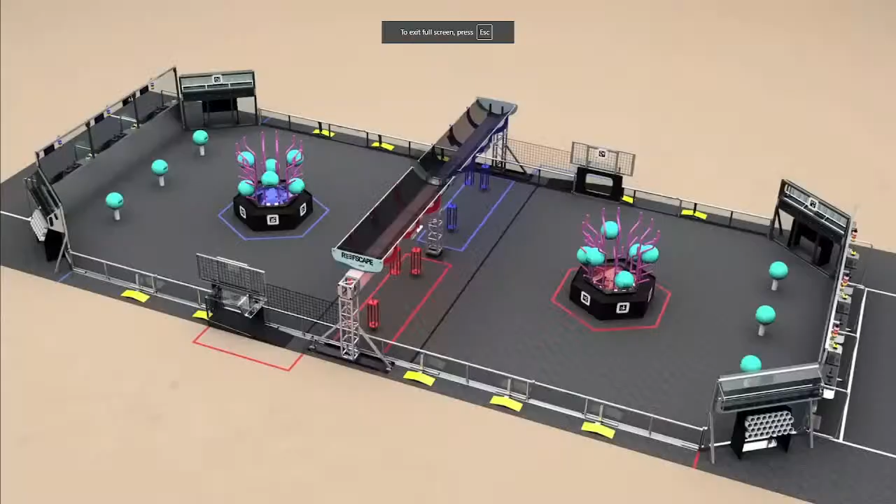Welcome to the 2025 First Robotics Competition game, Reefscape, presented by Haas. Two alliances of 3 teams each compete to earn points by harvesting algae.

As many people have already realized, there's no point in throwing algae into the barge. That's just something I've noticed through Chief Delphi and through my own team experience. It's just going to be too unreliable to shoot it up. I still think we'll see bots that place it into the barge. It's a lot of time for, granted it's a fair amount of points, it's just a lot of time that you could be scoring coral.

To earn points by harvesting algae, scoring coral on their reef, and returning to their barge to ascend to the...

One thing I would like to really fit in this robot is a deep climb. I don't know how doable it is, but it would certainly be a good learning experience to manage what I can actually do.

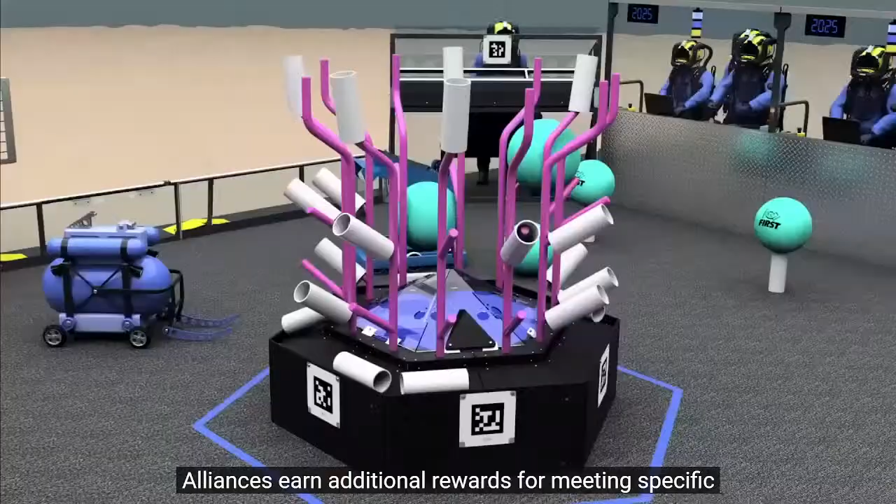The ocean's surface. Alliances earn additional rewards for meeting specific scoring thresholds and for cooperating with their opponents. Prior to the start of the match, teams can choose to hang a shallow cage or a deep cage on their barge. Robots start each match at their starting line and may be preloaded with 1 coral. During the first 15 seconds of the match, robots are autonomous and can be programmed to leave the starting line,

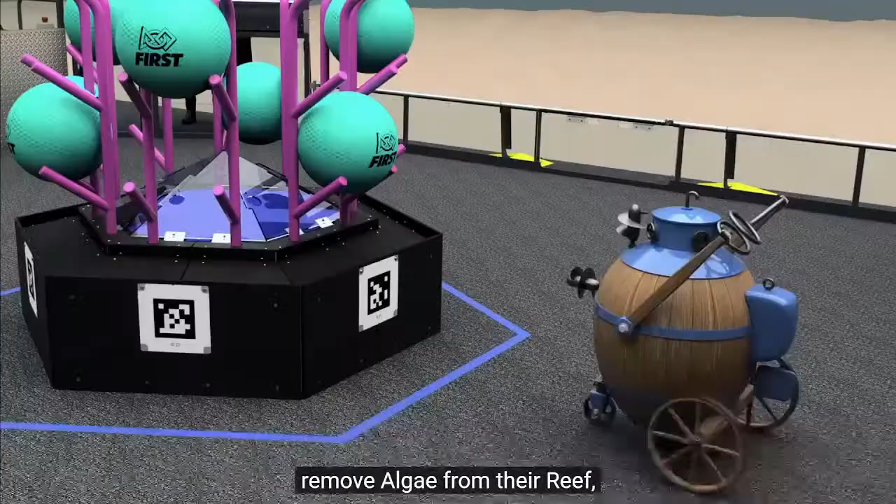remove algae from their reef, and place coral on their reef.

So another thing about my robot is I've got 2 ideas for how I want to score coral. My main idea is just a simple 2-stage elevator that can extend up a bit higher with an arm that scores on the top part of the reef. I also have another idea, which, if I can do it, would be really cool, but I don't know how the rigidity would be. So I was thinking, what if I do a 4-stage elevator with 1x1 tubing?

I don't know how this would work. Maybe it's a terrible idea. If it is, tell me. But I think it could be really beneficial because I could keep quite a low center of gravity, and it might make climbing a lot easier, especially on the deep cage. The deep cage, if I remember correctly, is only 3.5 inches off the ground, so it's a tricky one. If I go with that idea, I'll also be doing a funnel to retrieve coral, pick it up, and then extend upwards with the elevator.

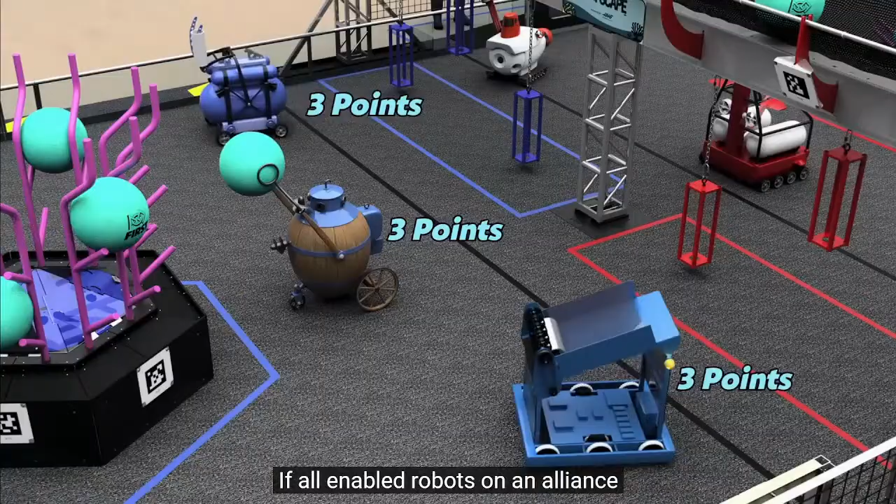If all enabled robots on an alliance leave the starting line and score at least 1 coral in auto, the alliance earns the auto ranking point. During the following 2 minutes and 15 seconds of the match, drivers control their robot.

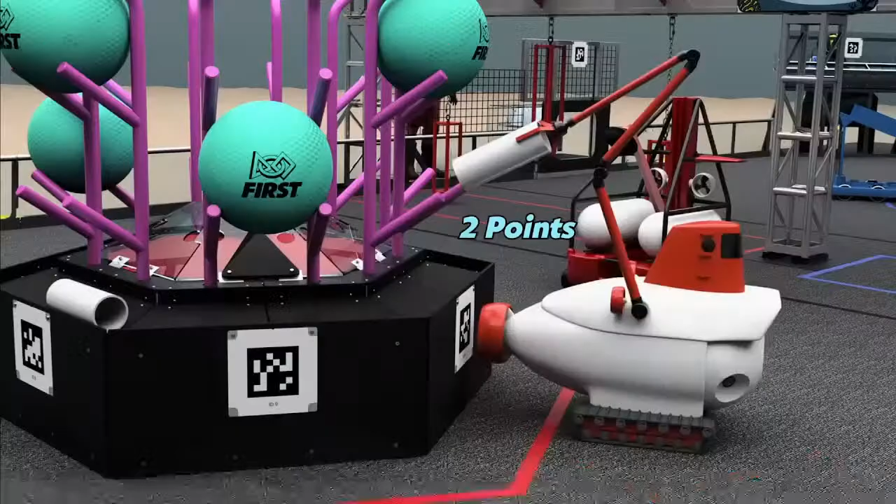Robots can place algae in their net and collect coral from human players at their coral station to place on their reef. Coral placed higher on the reef are worth more points. If an alliance can score enough coral on all 4 levels, they will earn an additional ranking point. The ranking point,

Again, it would be good to have pretty fast cycles to get that ranking point, though you'll see later on it might be worthwhile to also have an algae manipulator, either part of the same mechanism or a separate thing to remove algae from the reef, score it to lower the ranking point threshold.

Robots can also deliver algae - here it is - to their processor. Once processed, the algae can be taken by the opposing human.

One thing to note here is I paused it right when they said it, but this was a little unclear to me at first. Your human player isn't on your side, it's on the opposite side. So when you score algae into your processor, which is what they just showed, it gives it to the opposing team for the opportunity to throw it into the barge, the upper part.

The good thing is, even if you score a processor point and they make it into the barge, you still have a net 2 points that you gain, with the possibility of 6 points. To explain that, scoring in the processor is 6 points, but then the human player can throw it into the barge for them to gain 4 points. So it's kind of a trade-off, human player and scored into the net.

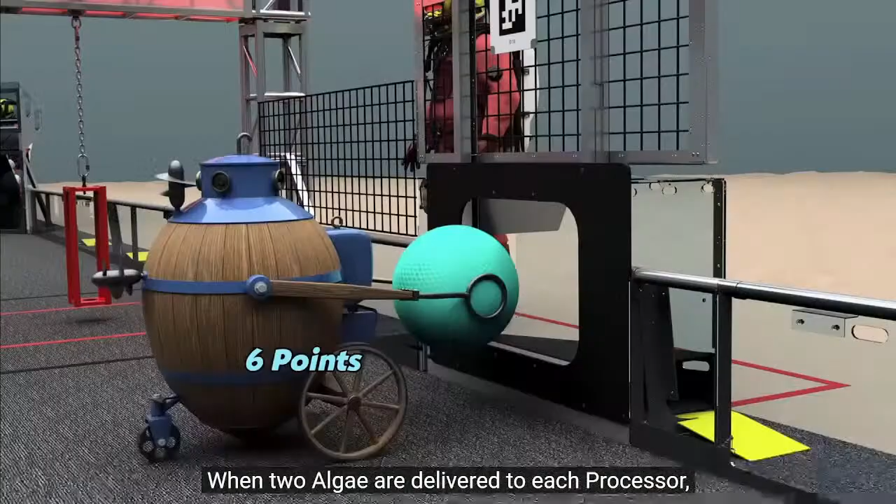When 2 algae are delivered to each processor, both alliances earn a co-op point. The co-op point reduces the number of coral needed on the reef to earn the ranking point. This is what I was mentioning before, where it makes it a lot easier to get ranking points if you can score that 2 algae, and it influences a team's rank in the tournament.

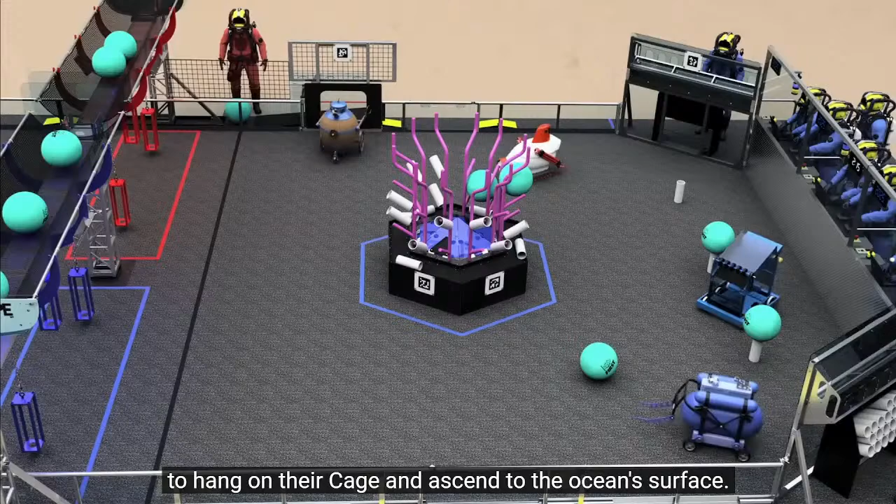As time runs out, robots race back to their barge to hang on their cage and ascend to the ocean surface. Points are awarded to robots that can hang on a shallow cage, and even more points are awarded to robots that can hang on a deep cage.

An alliance that scores enough barge points will earn the barge ranking point. That requires 14 points in endgame. So deep climb is really good to have, because if you can deep climb, you're pretty much guaranteed a ranking point every match unless something catastrophic goes wrong.

Deep climb gives you 12 points and just a park gives you 2, meaning if you have like just a chassis bot and a bot that can deep climb, you've automatically got a ranking point for endgame, which is really good. Granted, having a chassis bot on your team isn't the best idea, especially after alliance selection, but you win some, you lose some.

The thing about shallow climb is that it's only 6 points, so it's half the score towards that ranking point. So you would need 2 people shallow climbing and another person parking for the barge ranking point. The alliance that earns the most points overall wins the match.

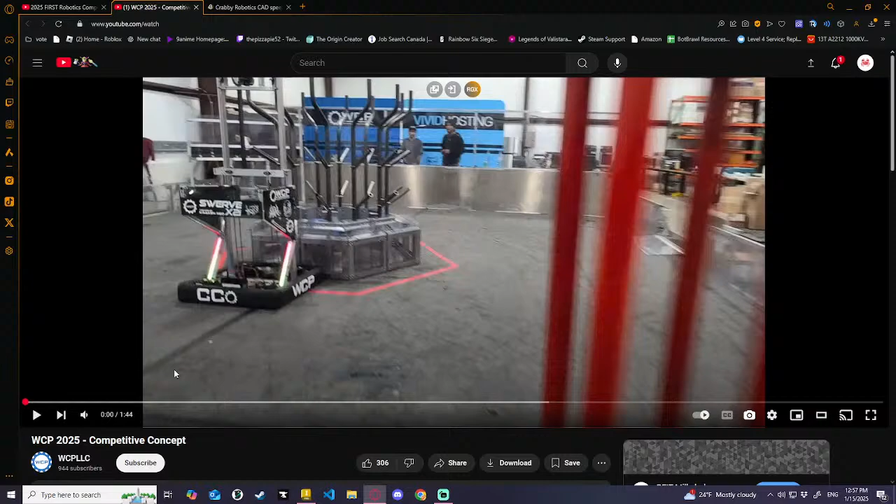So next thing we're going to watch is the WCP 2025 competitive concept. This is a bot that West Coast Products put together, one of the FRC suppliers. Without further ado, let's just watch this and see what I can gather from how they assembled their bot and how I want to do mine.

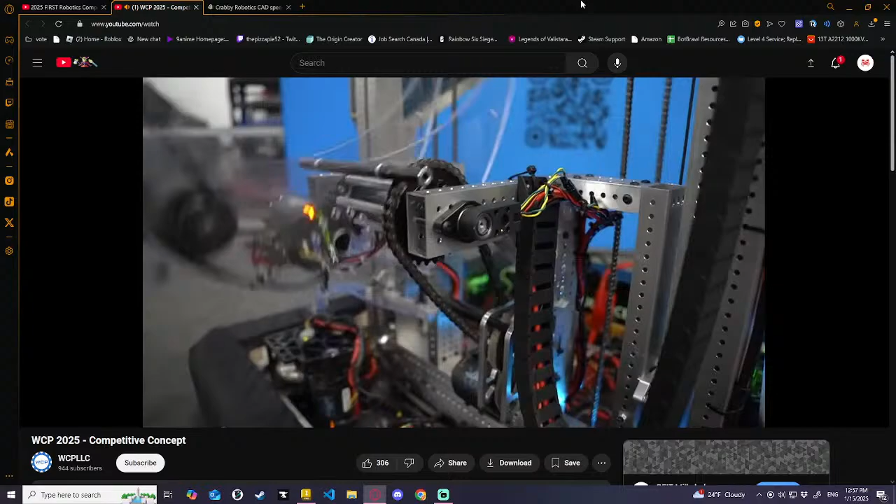One thing I would like to note is what they're doing is 2 stages in a carriage, which definitely works, but this bot would likely have a really high center of gravity, meaning it's a bit more tippy, and the elevator probably can't accelerate as quickly.

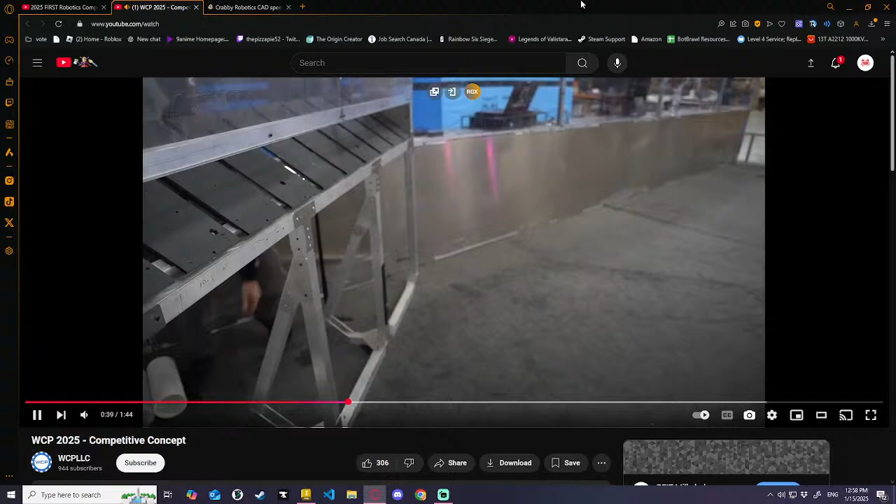One more thing I would like to mention is, see how they have the funnel there? They have a limit to how fast they can cycle, not by their drivetrain or anything, but because when they feed the coral, they have to wait at the human player until the elevator is in its rest position. So right here, you can see the coral manipulator. This has to be in this position before they can drop the coral, because if they don't, then the coral is just going to spit right out the other side of the robot.

That's what I believe, at least. I haven't taken a look at their CAD yet, but I probably will at some point in the future.

Yeah, see how their coral kind of spun around a bit here? Rewind. Yeah, I'm not sure why it did that. Maybe it just caught the wheel at a weird angle, but that's something to consider, because that could have easily deflected and gone straight out the other side above the manipulator.

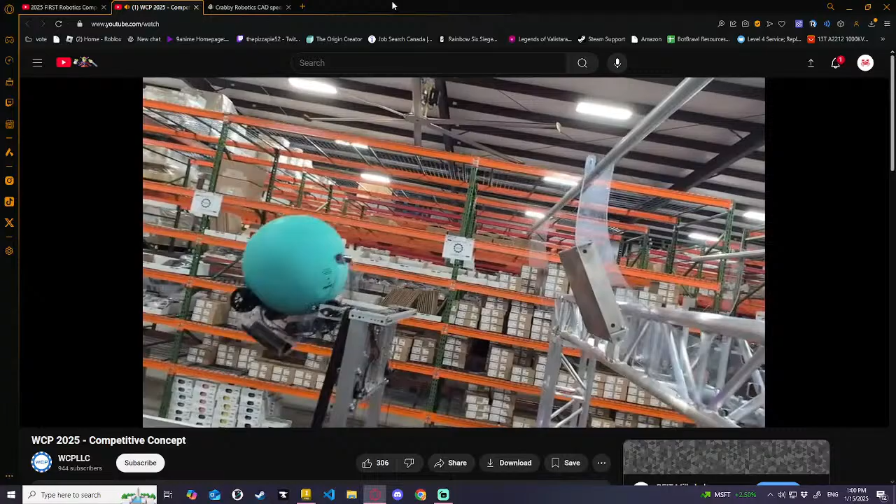I'm really impressed that they actually managed to do the barge with a 2-stage and a carriage. And of course, shallow climb. Not a deep climb, but still very impressive.

Alright, so that was the WCP competitive concept. Next, we're going to be looking at the 2025 EveryBot. This is the last thing next we're going to look at: Ninjineers Robot in 3 Days.

This is a bot that I really like. Hopefully they have the review video on here. Yep, here it is. This is a really cool robot. I'm like, if I was to build a robot in 3 days, like take one of their designs and build it, this is the robot I would choose.

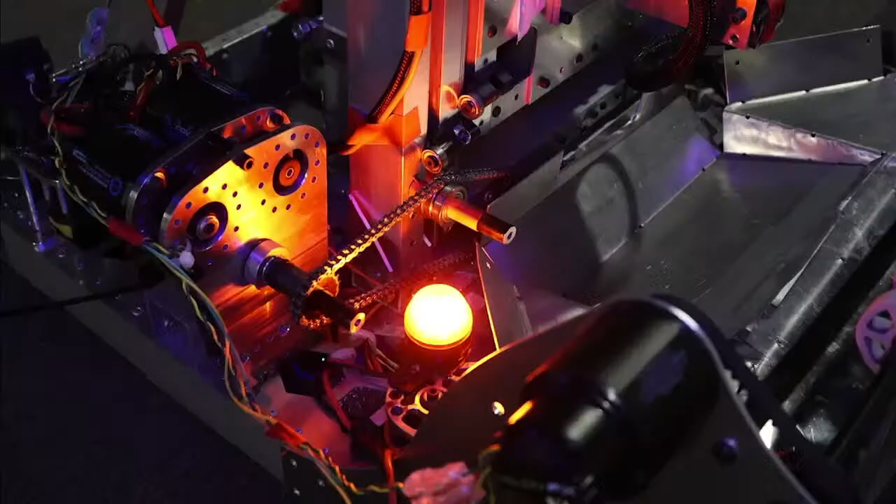One thing I'd like to note is I like that they have that ground intake, because I feel like it would be more beneficial to just drive into the wall, pick up the coral, drive away, and then worry about messing with your elevator.

Because even if you have something that feeds into a hopper and then picks up the coral, you still have to wait that slight amount of time where the coral is in free fall and falls into your funnel. You have to wait another second just to get it to rest in position so you don't shuffle it around when moving and get it lodged somewhere you don't want it.

So the good thing about this design is they have this intake with a manipulator that flips around and spits it out from the bottom, which you'll see in a second. So they can just get the human player to drop the coral on the field, drive straight into it, intake it, and drive away, then worry about their elevator adjusting and picking it up.

Yeah, I love the way they pick up coral. It's a really cool design.

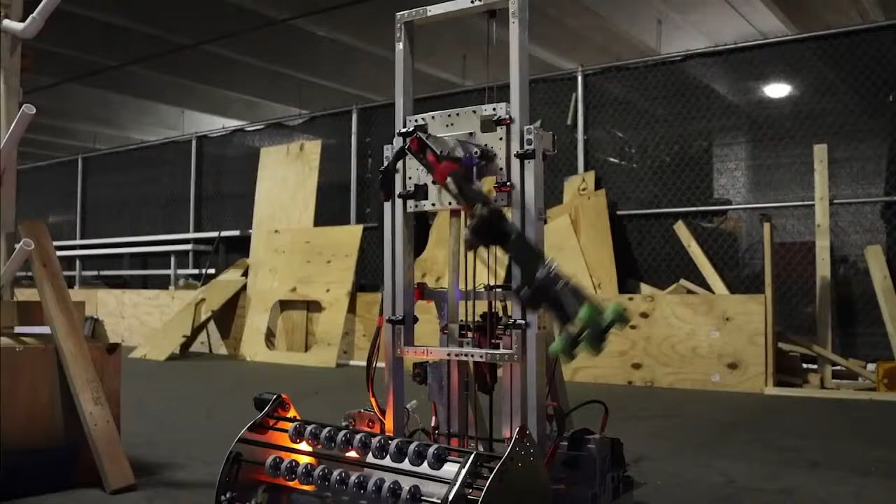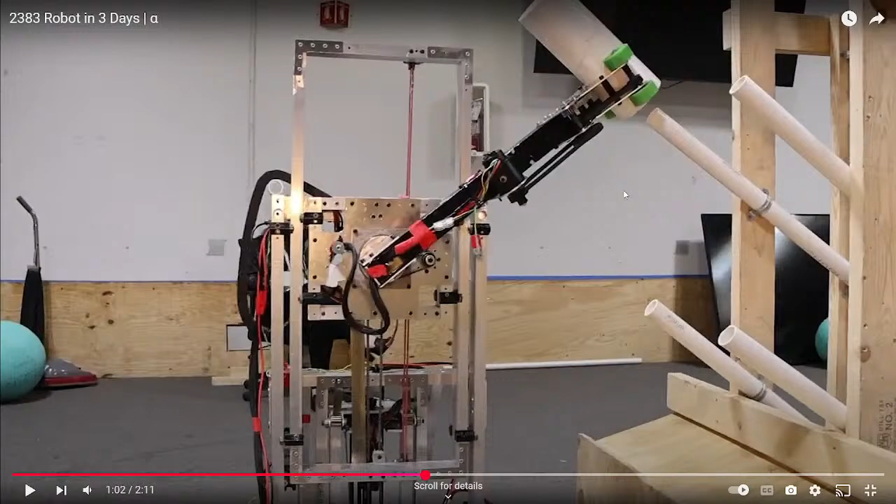The only thing I'm not a fan of with this intake design is the way they have to put it onto the thing, then go down and eject it. I feel like it would be faster to shoot the coral downwards onto the post, then you could drive away sooner. Just one thing I've thought.

Such a cool way to program the elevator to pick it up. I really like it.

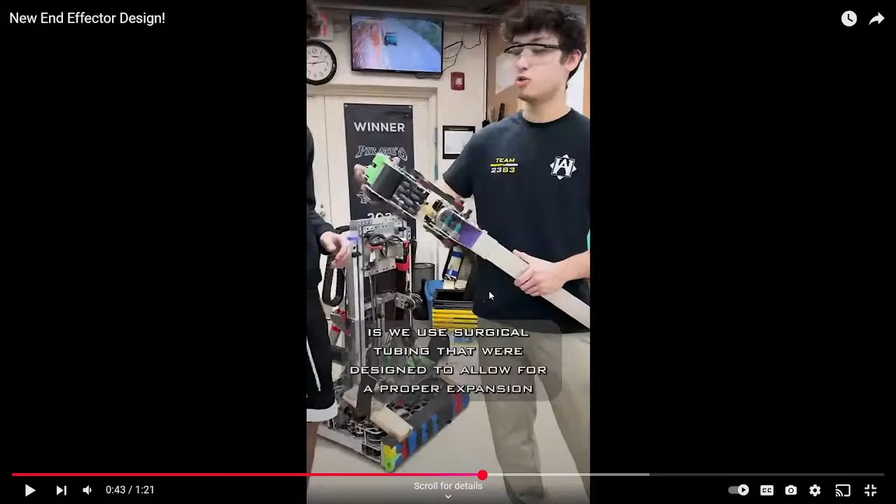Well, they also have a really cool end effector that I want to show you. It just replaces their old end effector, and yeah, surgical tubing instead of springs. It's probably lighter, allowing for proper expansion with proper compression of the algae as well as the coral.

The final kicker of our new design is, in fact, a center kicker. Yeah, that's the one thing I was worried about, not having that center kicker to shoot it down, and it seems like they've fixed it on this design, kicking out the coral when scoring rather than forcing us to slam down to outtake it.

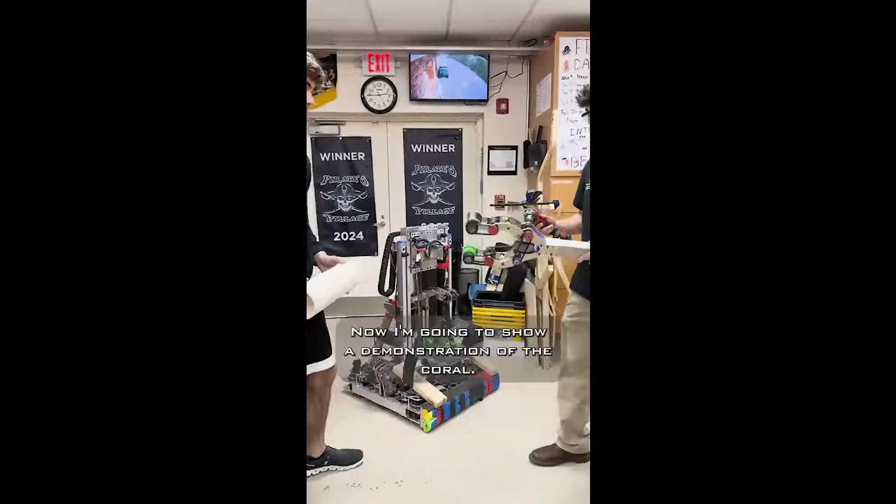Now I'm going to show a demonstration of the coral, and then score it on the kicker, just like that. Now for the algae.

Yeah, having that kicker will 100% reduce their cycle time. Blown up to appropriate size is how we take it, and they have a really strong grip on the algae, it seems.

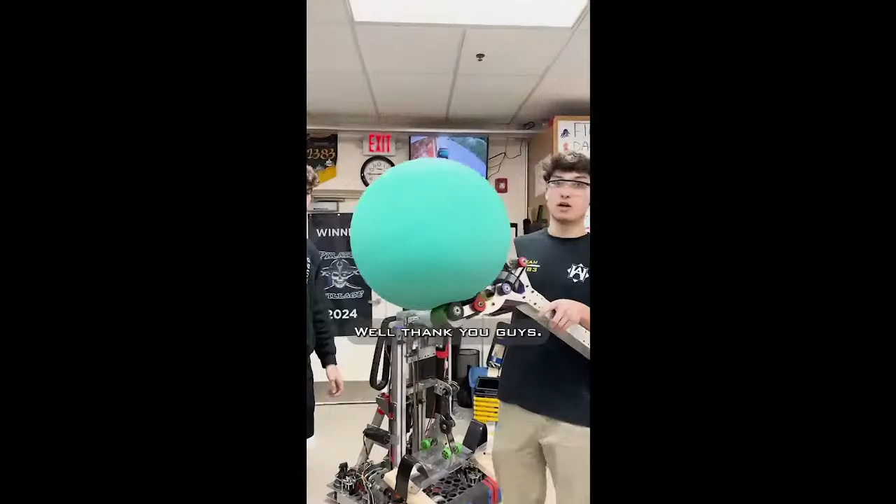Alright, we're not going to worry about watching the everybot.

So without further ado, I'm going to create a master sketch and start plotting out what I want everything to be. Okay, if I see elevator blocks, this is something I'm going to need to decide on - what elevator blocks do I use or modify to use?

One thing I was looking at was something like this, where it clamps on either side of the tube. Because then I don't have to create anything custom, like create a new CAD. See, they show it even working on 1x1 tubing here - it just clamps around the outside. That might not be the exact same one, but it shows the proof of concept.

Yeah, there's obviously not a whole lot... oh no, AndyMark has something for 1x1 tubing. I lied. But generally, most elevator blocks for FRC are made for those 2x1, like 16th or 8th wall tubing.

I definitely think 1x1 tubing is the way to go with the amount of stages I want, because on my own team recently we had issues with weight and our elevator being really, really heavy. So I think this could lighten it up by using 16th wall 1x1, and then I might not encounter as many weight issues.

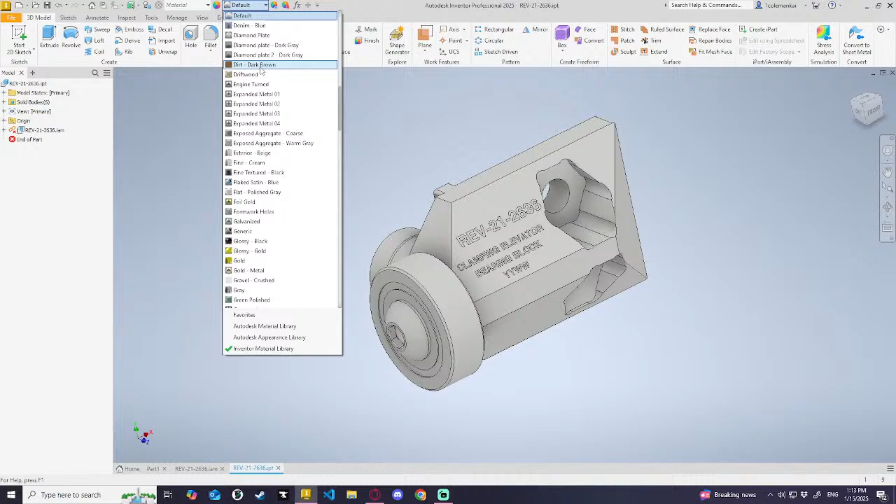Should work. Oh, that did nothing. Just gonna set this to glossy black. Yeah, that works. I need to save this because I have the simplify.

Alright, let's start planning the elevator. So we need 1x1 tubing, 1 inch.

No, I'll do a mirror. Should work. I'll just focus on one side for now, actually.

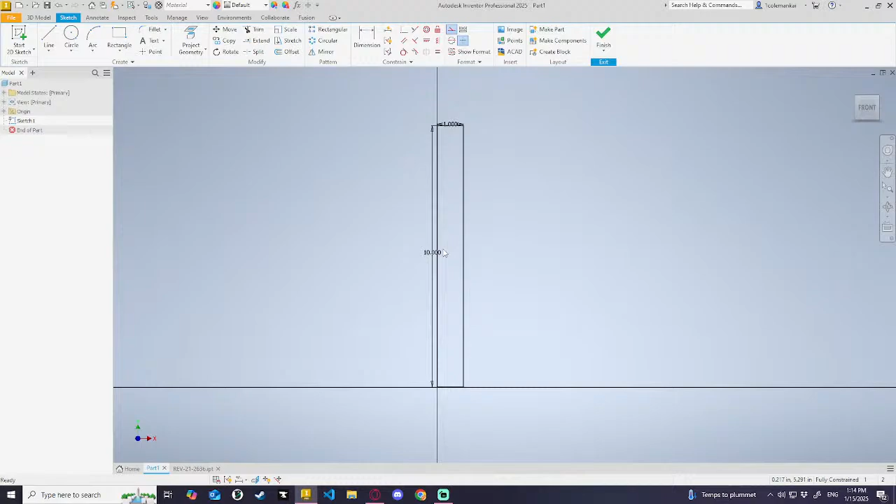A little indecisive. So if I do 4 stages, highest is 72. 72 divided by 4 is 18. So if I do 20-inch stages, that should give me more than enough room to reach the top of there, maybe even the barge, which I don't think I need to do, but might be a cool thing to do.

No, I don't need a drawing. What am I looking for? Here we go.

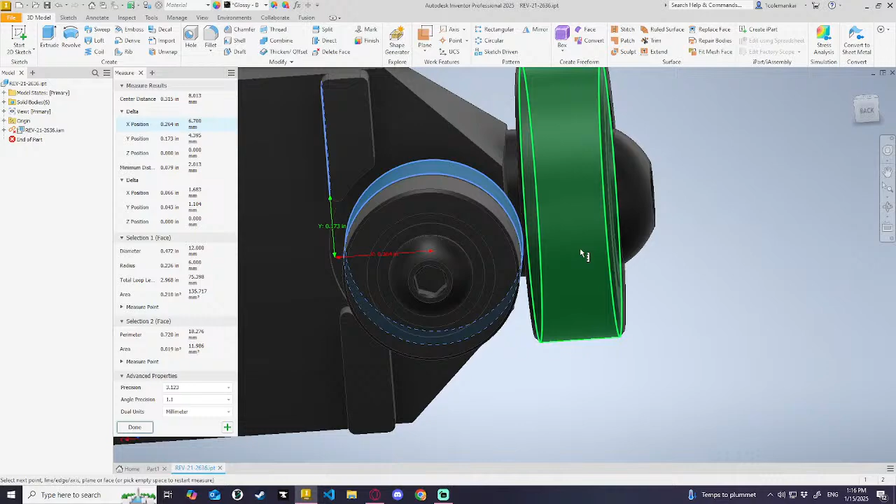It's not ideal, but it is what it is. It's mounting to the side, so it has to be a decent bit. I was thinking of the WCP or SCS ones that mount to the top, like through it.

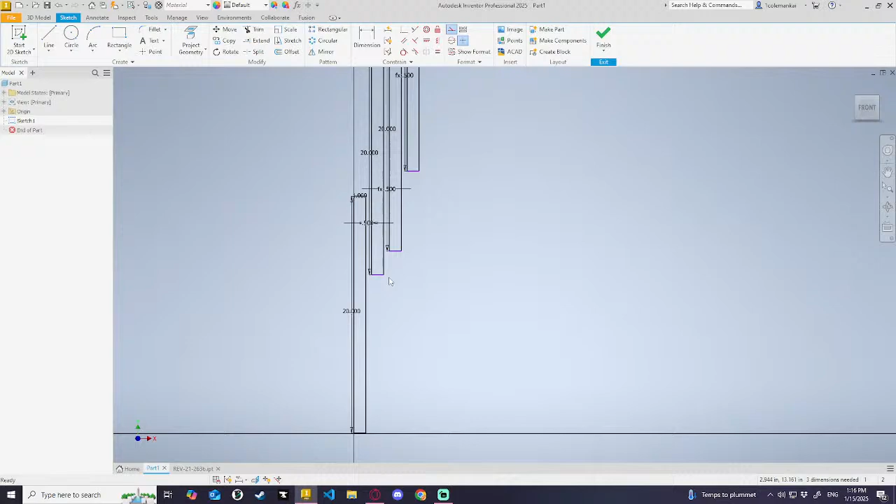Alright, now I can set. Do I want continuous or cascade? Cascade might be a bit easier to design because I'm not too familiar with continuous. So yeah, I'll just leave it as cascade. But for this demo, I'll do continuous just so I can simulate it.

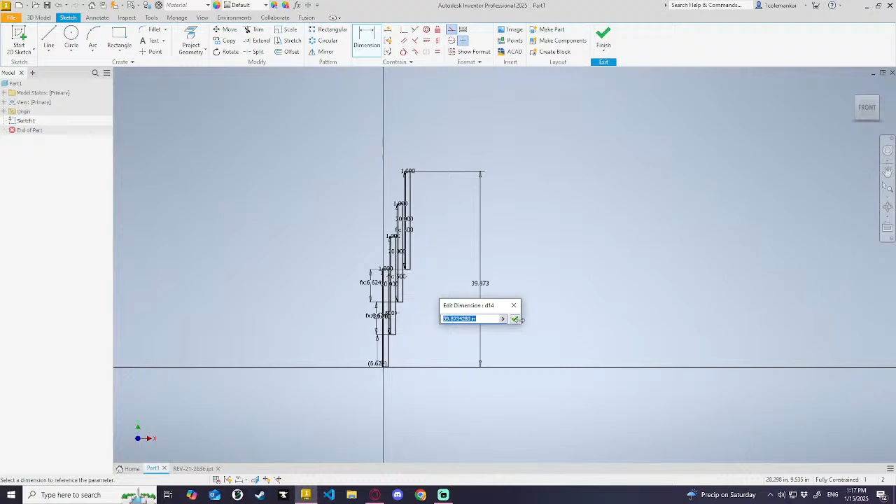Right now, I do twin dimension here to here. Except, okay, perfect. And my maximum extension is going to be over 72 inches. Probably closer to, let's just set this to...

Say 1 inch, that's our limit. 77, that's plenty, that's like on the extreme side. Now I can just create a line here, doesn't have to be perfect. Mirror this.

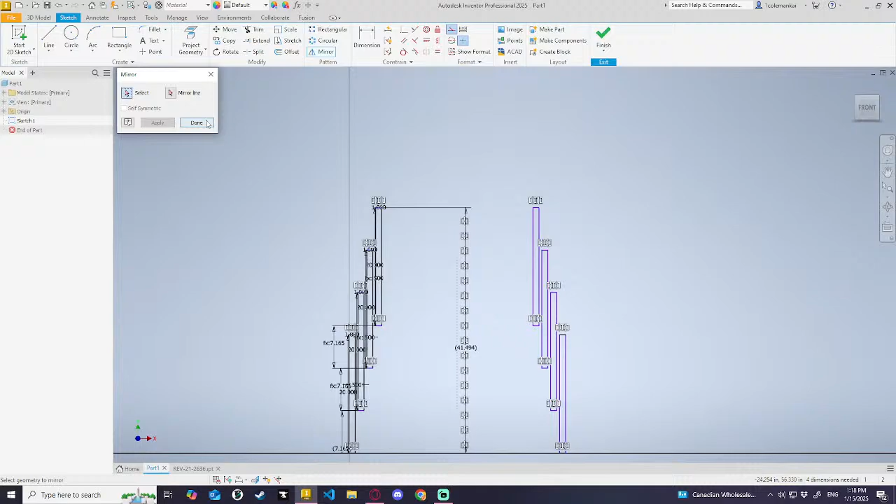Outside of these lines should be 30 inches. What does that leave me on top? That leaves me 19. That's more than I need, so I set that to driven.

That to not driven. Say 10 inches. 21. I think that works, just gonna do a sneaky sneak.

Check what this... No, no, no, no. Oh, that's what I need.

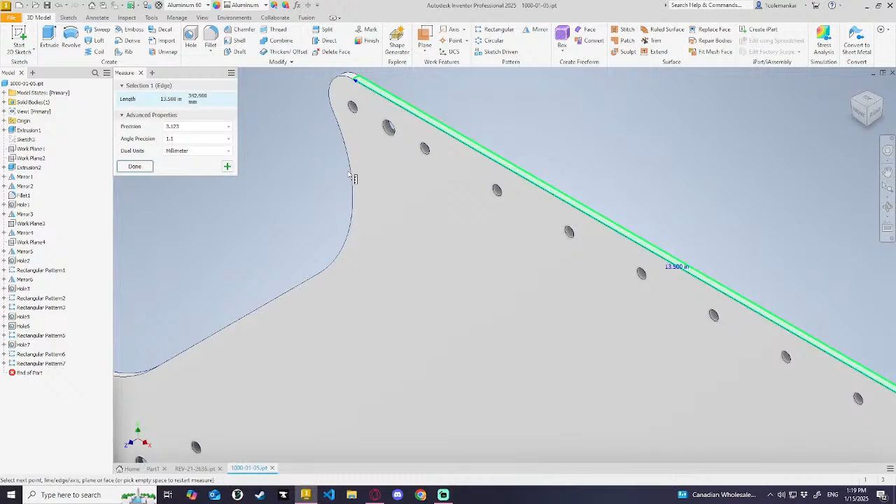I can probably fit my entire thing with an 8. It's 19, yeah, I can just do some standoffs. Let's be generous with 9 and call it a day.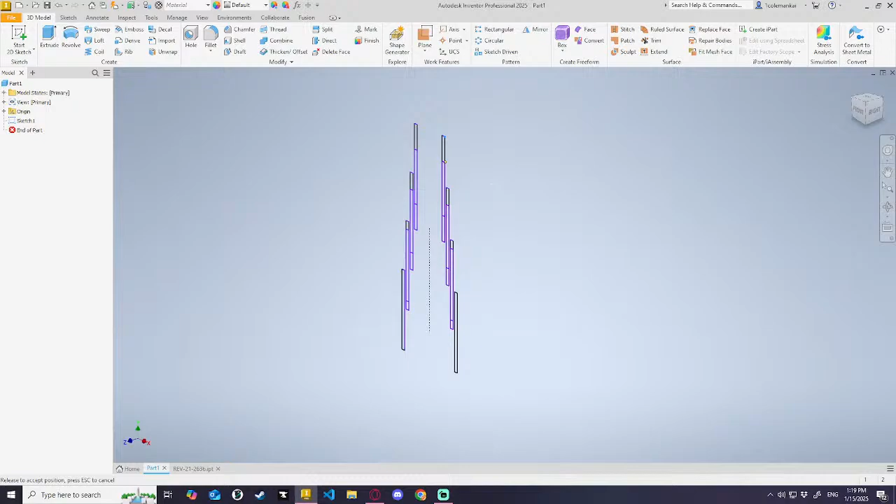No, finish. Good, turn off dimensions. And there's my elevator, 4 stages, all the way up to there. This is gonna look really clean when the CAD is done. Alright, now I can save that.

Now I need to make a sketch for our manipulator. So I have to decide if I want something that goes through the center of here, or across the side, or over.

I remember seeing something on Chief Delphi, I can try and find it. Trash CAD. Here we go. This is what I was thinking of.

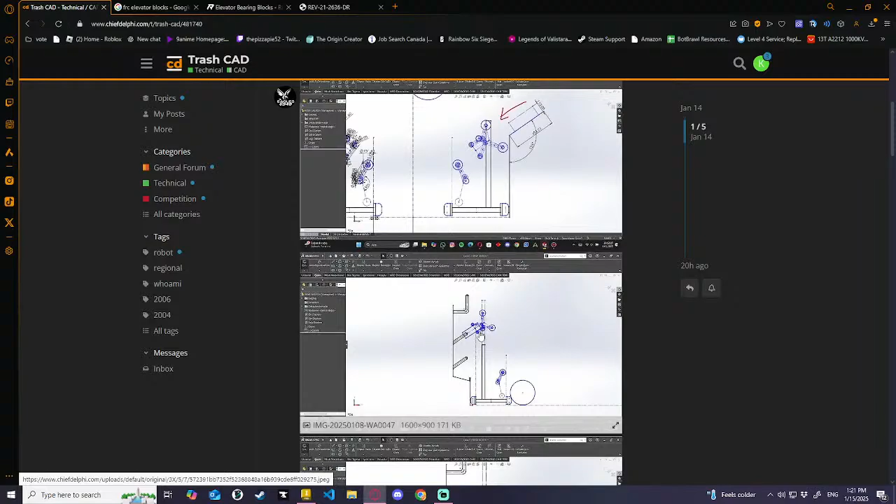So it's got one side for algae, one side for coral. The whole thing can spin around and pick up whatever it needs. There are teams, including mine, using the same 2 rollers for picking up algae and coral, but I think it might be better for sustainability of the algae and reliability to have separate, more spaced rollers for picking up algae, which shouldn't be too much of a weight loss or weight gain.

I think I can make it work. I'll just use about this here. Yeah, see, it's got the, no, not that one. No, maybe that was right. Yep, yeah, this is what I'm thinking of.

So it's got smaller rollers on the front. I think it has sushi rollers across here or something similar, like a roller, roller, roller. So 3 sets, 6 sets, because there's 2 on each. But I think it'll work.

Ah, I keep misclicking Visual Studio Code. It's annoying.

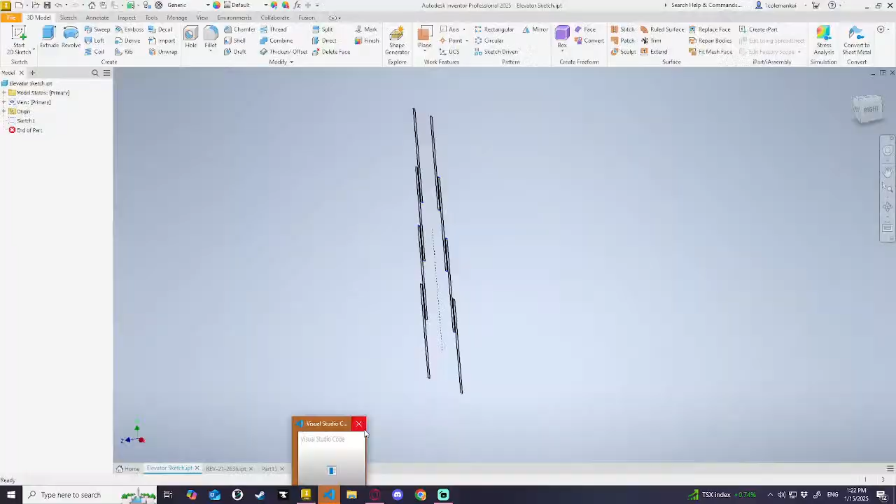I'm doing an orange roller. Now line. Oh, line between the two. Make that vertical and construction.

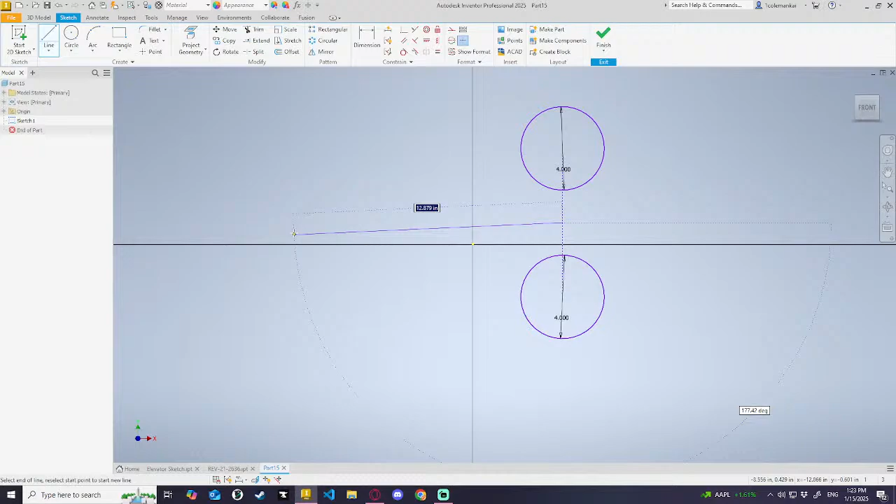And I can do 2-inch roller dots, kind of that construction.

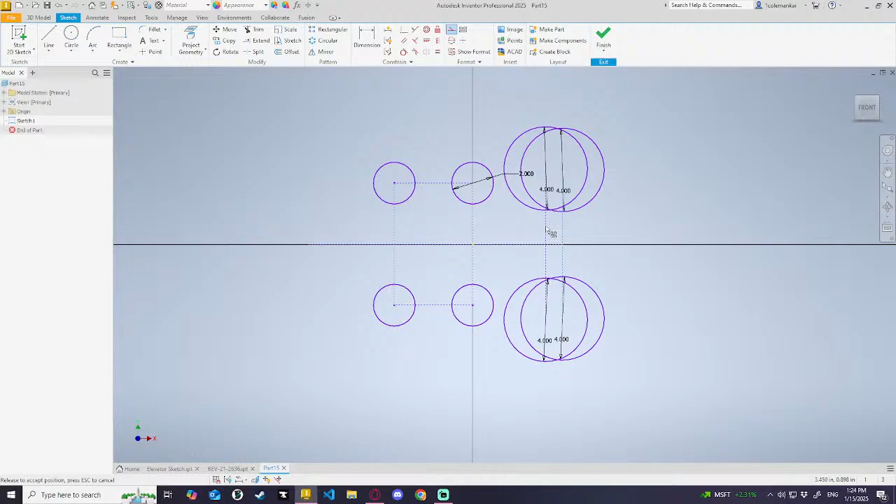Okay, so this is kind of what I'm thinking. Maybe it's definitely not to scale yet. Probably be more like this, with these farther apart from each other. This distance, let's say 3, so its total is 4.5.

Let's try 4 just to start. This 3 inches away, no, 4 inches. This to this, 3. Yeah, that'll work. And then if I add a 16-inch ball,

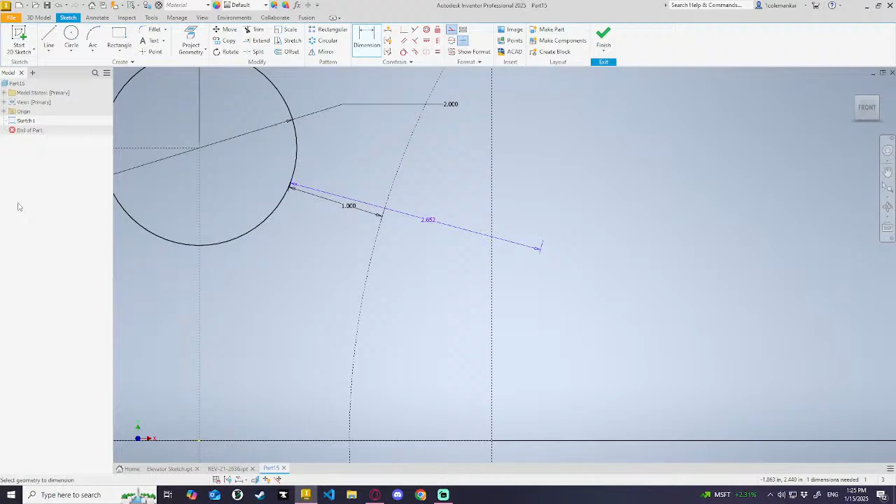tangent that, tangent that. Here, here, for that to be 1 inch. It's a bit more than I want. 2 inches. This is gonna deform, so I can probably do 3. Yeah, I'll do 3-inch wheels.

Set to 2. No. 4-inch with 2.5. Also trial and error. This is gonna be 3. So that's my rough idea for all the spacing and everything, how it's gonna look.

Then I'll have belts going from here, like between these. No, what do I want to do? I'll do a belt here, no, here across. And on the other side, belt to here, no. Might have to do behind, in front, behind, in front. Then connect the motor to one of these, like running to here.

I'm just trying to think how to package this well. Oh! I might be able to fit small pulleys inside the center, because that might even help the coral. When it squishes, it'll ride along the belt. We'll see. Yeah, I think that'll work.

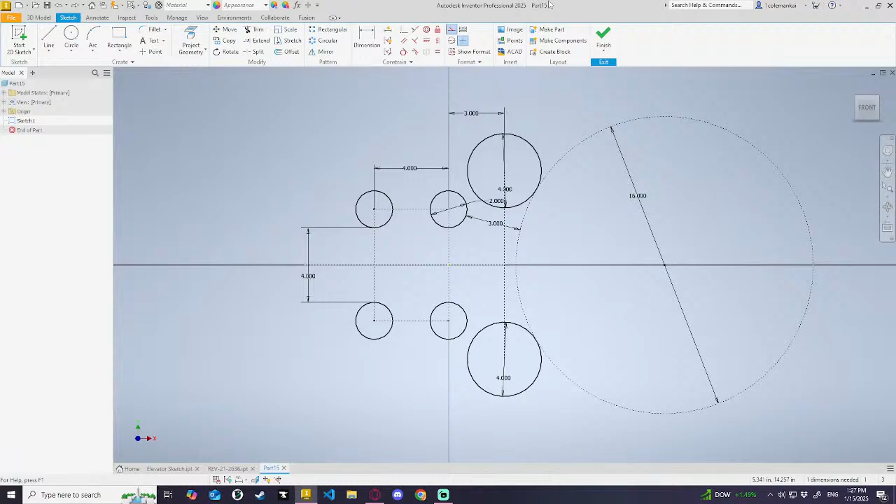Or actually, I'm gonna make my actual part first. Save this as... then do a new part and pretty much just remake that, or I can just save as.

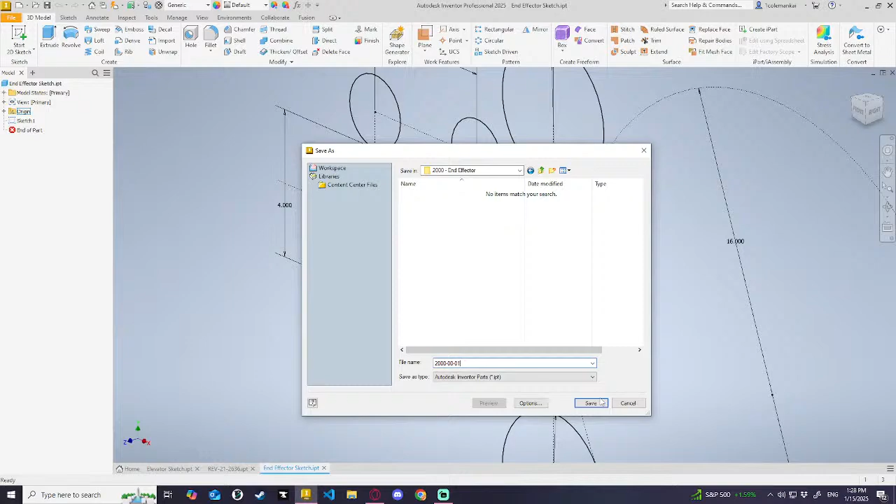So now what I can do is delete that, set that to 10. Anything else I need? This is my center distance for this belt and this belt. So use 24 on all 4 of these.

And then I want these to run slightly slower, so I have a bigger belt on there. That's gonna reduce the speed. Oh, I need gears in here somewhere. Ooh, or 2 motors.

Gears is probably better. I guess I want to run 2 Neo 550s. That still doesn't weigh as much less than the 44, if not more. Smaller though, I think it's smaller. I have no idea, I haven't actually seen the 44 in person yet because they're all in Asia.

So I think I'm going to use the 44s so I don't have to worry about motor controller mounting and everything. Just mount the motors, mount some energy chain, and call it a day. But I do need to figure out the gears.

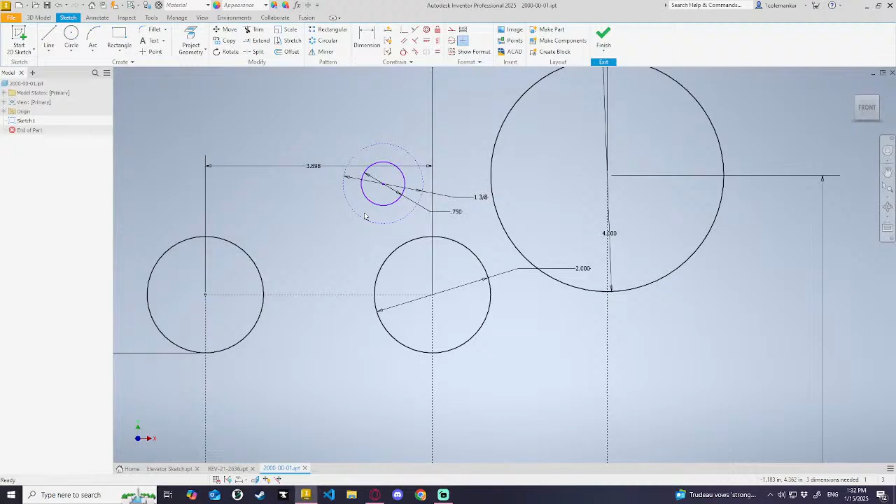I'm gonna set all of these to construction now, because they are. Just using the offset command so I don't have to figure out the point.

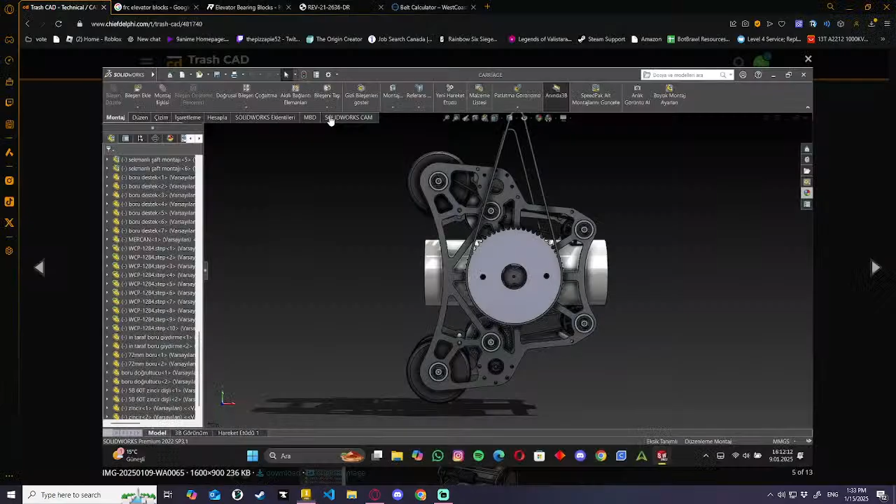Kraken mounting. Not gonna worry about the bolt pattern yet, like in the sketch, I'll do that with a hole command. This is just my extrusion, so I want this to be... let's see what 4 inches looks like. Or 4-inch desired.

That's not too bad. I wonder if I could get it so there's 2 pulleys going up there. Or what I can do is put the crank right here between the 2. I like that, yeah. I can keep the weight more central, which probably doesn't matter, but we can pretend it does.

So I need desired center 1.8, and desired center... 3 and 2 maybe, yeah, 3 and 2 works. So I need 3-inch, 24... no, yeah, 16 to 24, desired center 3 inches. 2.949. And then desired center 2 inches. 2.061, so almost dead on.

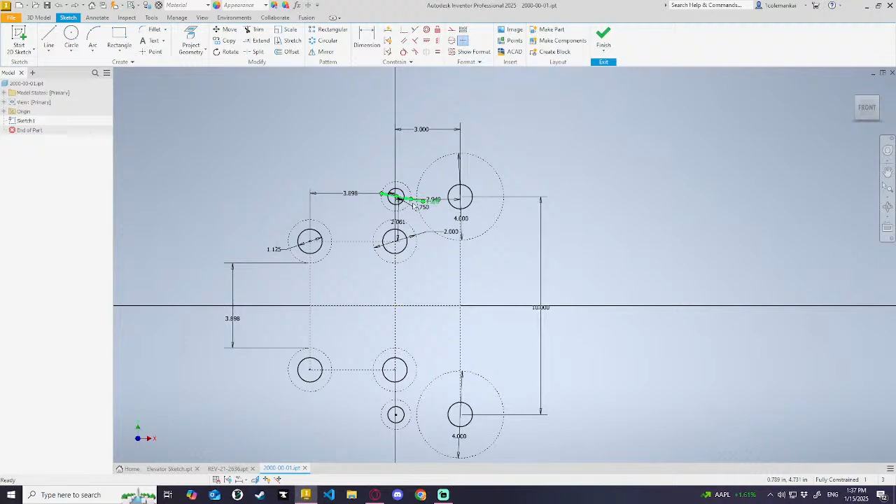I need to delete this. Oh, I have to make this driven. This can just be in line with that. This undriven, 3.5, nope, but I need to set 1, 2, that's it. Yeah, that works, worried about these two touching. I have to bump up this belt a bit.

14 to 24, and that's gonna be... ooh, maybe I was using 16. Yeah, I was using 16. Still 3.6, big jump, it'll still work. Yeah, I'm still within like a semi-curve of the center.

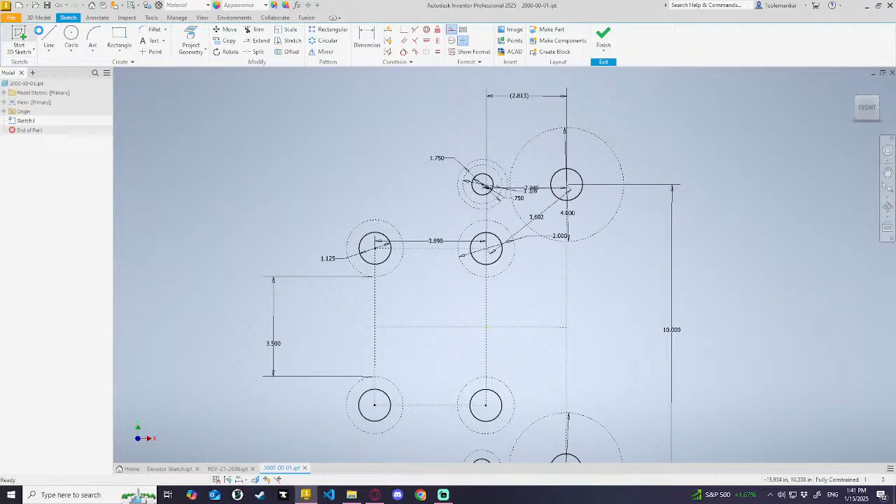So I'm going to just enclose this now, extrude it. Sees. Do a line from here to here, to here, here.

Oh, I don't know what that was. Constrained width, but okay. Generate constraints. Oh, I already deleted those. And then one last. Oh, did this wrong, this doesn't go here, this goes across here. Come on, there we go. What the?

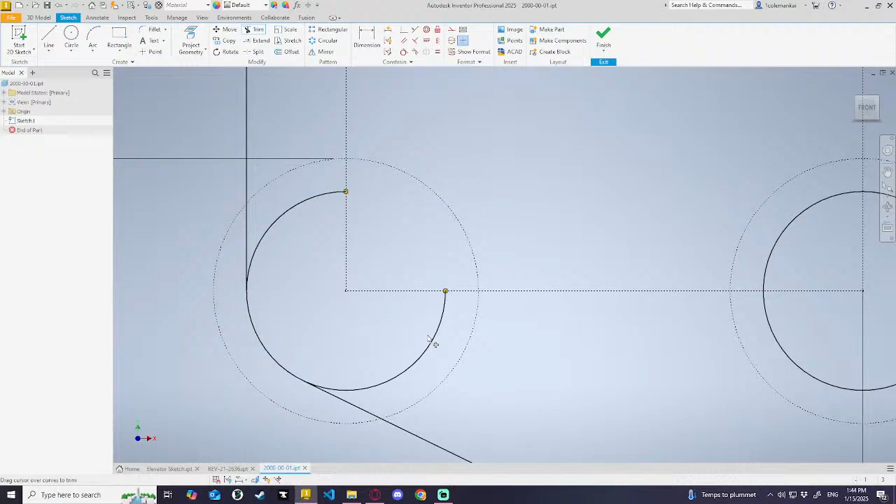I'm gonna trim this out, that out, just set those circles to construction. This is my exterior, then I just need bearing holes, which I removed because I realized I tangented everything to the bearing holes, so it wouldn't work right, so I had to work around it.

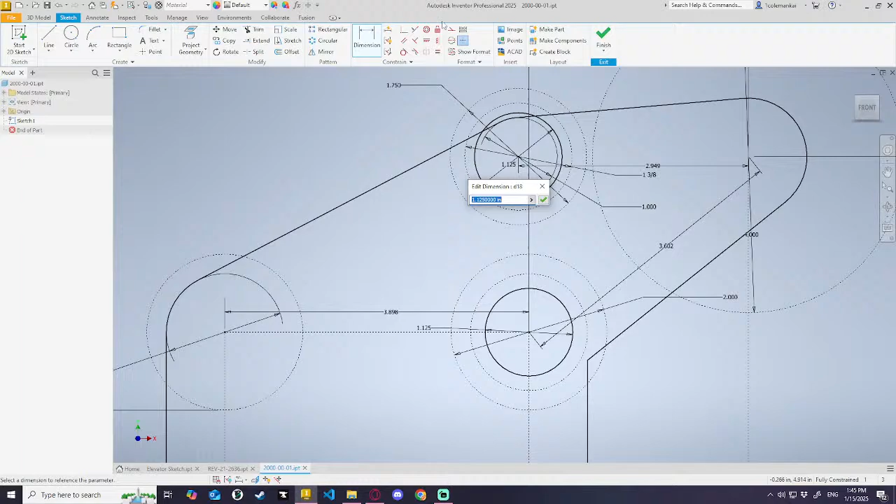Just bam, bam. That's not right. What? Oh. Set that to 1.25. Why is this one different? Oh, I know why. This is gonna be 1 inch. This is gonna delete, be 0.75. There we go.

This needs to be big enough for that moment, so let's say 2. Maybe not 2, 1.75. 5/8, yeah. I'll just make 1.75, so same as that. Perfect.

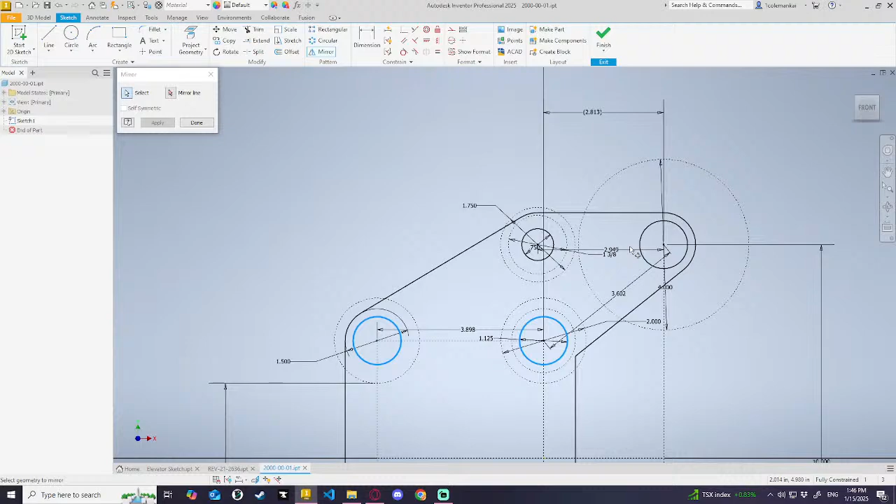Then I can do my actual bearing holes because that was the motor guide, whatever. I'm lazy, so I'll just mirror this. So this should be done. Let's add a nice big radius on the inside here.

Alright, that is done. I'm not going to do any weight reduction yet, right now it's just straight parts. Oh, I want that wall bigger. Just going to do here to here, 8s, because it's probably going to be polycarb, so I might not weight save it at all.

Now, 1/4 inch, midplane, polycarbonate. There we go. Now we've got motor, wheels, wheels, motor. Yep.

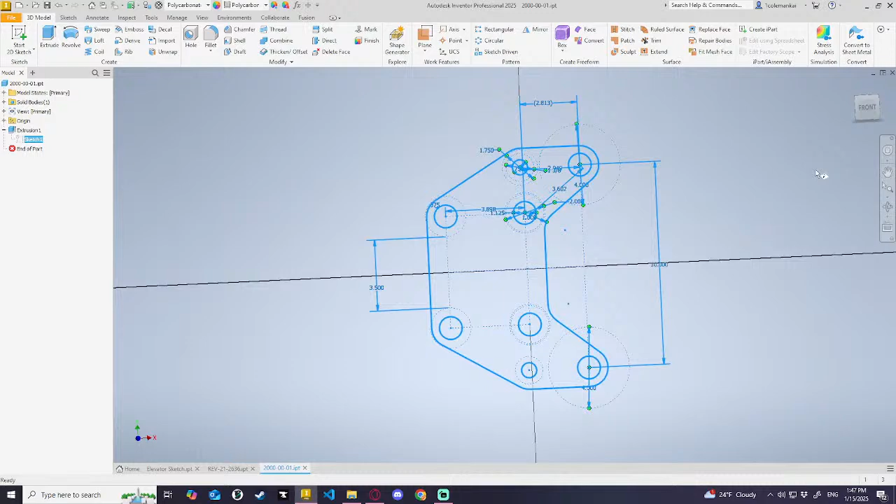What I might do, I might tweak this a bit. Instead of being a straight line, it's more of an arc. Tangent this, tangent this.

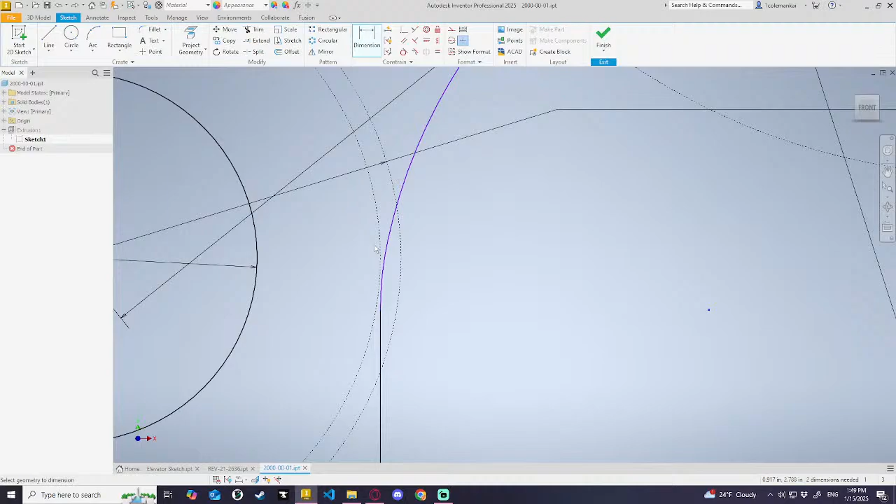That's not to be broken. Remove that constraint. Also 2.5, nope. Nope, 0.5. Nope. Alright, that works, set that to 2. Nope, set that to 1.

Yep. Now, where is it not constrained? So I can move it that way. Might be able to squeeze a little sneaky. Yep. Perfect.

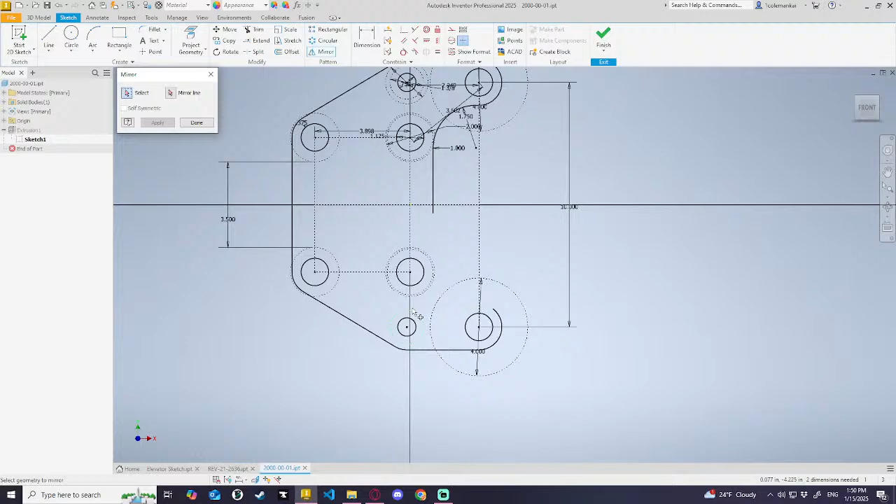Now I'll just delete this. And you know me, loving my mirror command. There is no more radius there. Hold on. Just gonna delete the radius. Yeah.

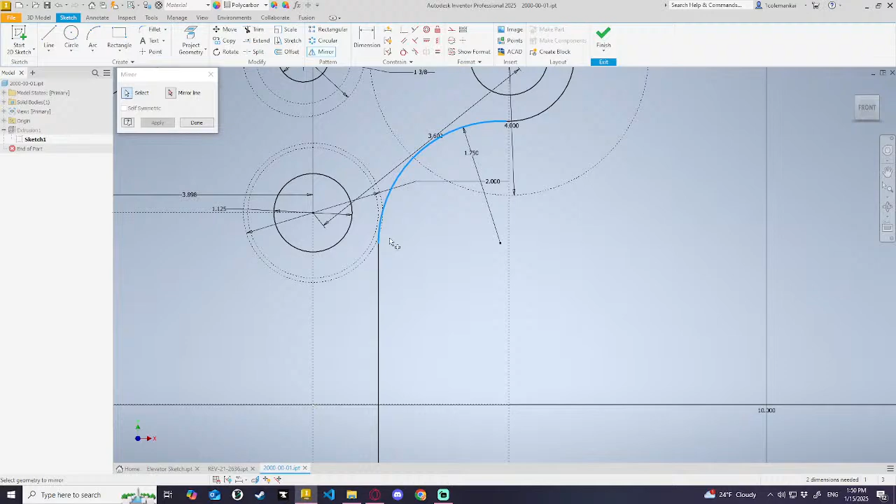Alright. Now, if I delete this, this... You know what? No, I don't need to mirror that. Redone. Redone. There, that's what I wanted. That was so much work for just a curve.

But that'll add more room for the algae to come in. I can even cut out this a bit. Ah, back at it again.

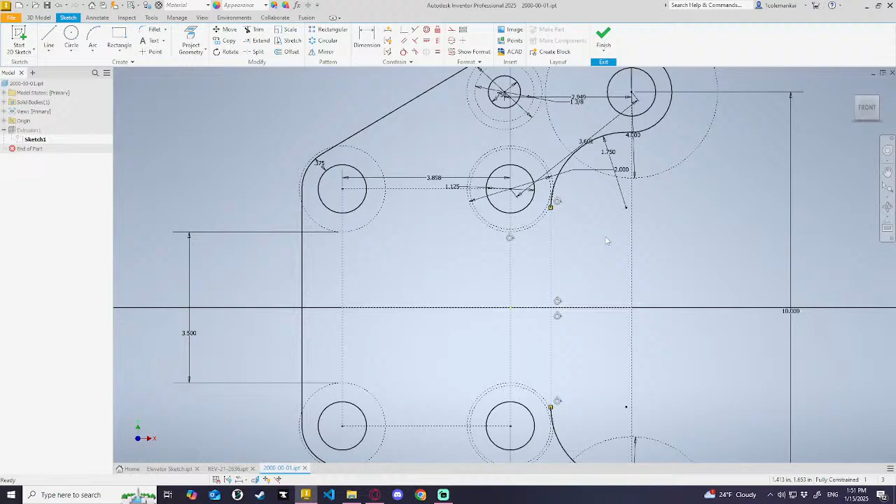I'm gonna do something a little sneaky where, bam bam, to equal, just fillet 1 inch right there. Now I can just slide this back. And let's just do this right on the center.

There we go. That's a little funky looking, but I like it. Alright.

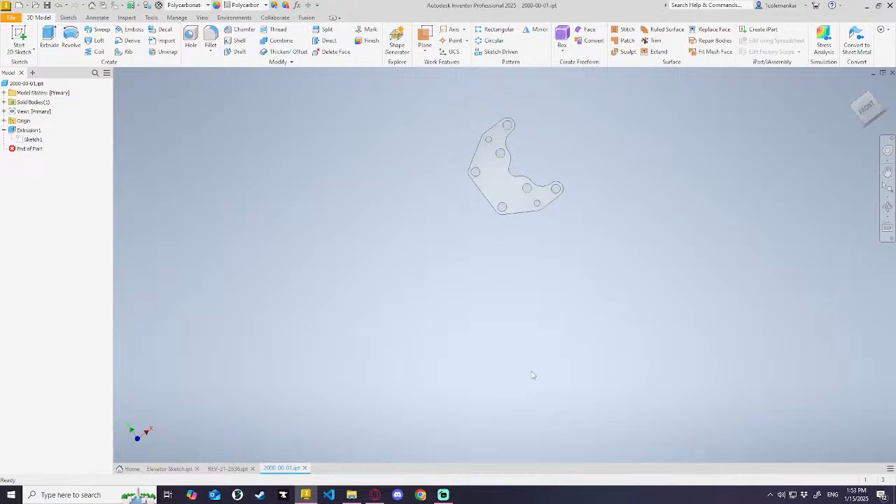So the way I'm thinking is we're gonna have a funnel that goes into the bottom of the robot. Then this will rotate that way while it's in the up position, go straight down, intake the coral, which is sitting up, like straight up in the funnel. I'll have to do some little geometry there. Then this goes straight down, picks up the coral, flips up, and then goes into scoring position. Elevator goes up and scores it, then flips back to this position and gets ready to pick up another coral. I think that'll work.

I don't know how much this assembly is going to weigh. That's the problem. There's one benefit to the way I'm doing this: since I'm doing 4-stage, I might be able to skip, like, not do a carriage. So I'm gonna try, see if I can get the geometry right. I might have to make my levels a bit taller and put it central. I think I can do it without a carriage, though. I want to try.

Just gonna quickly. Alright. That is hopefully gonna work. Saved. New. I'll just place things in the assembly as I go. Nope, not that folder. Whoops.

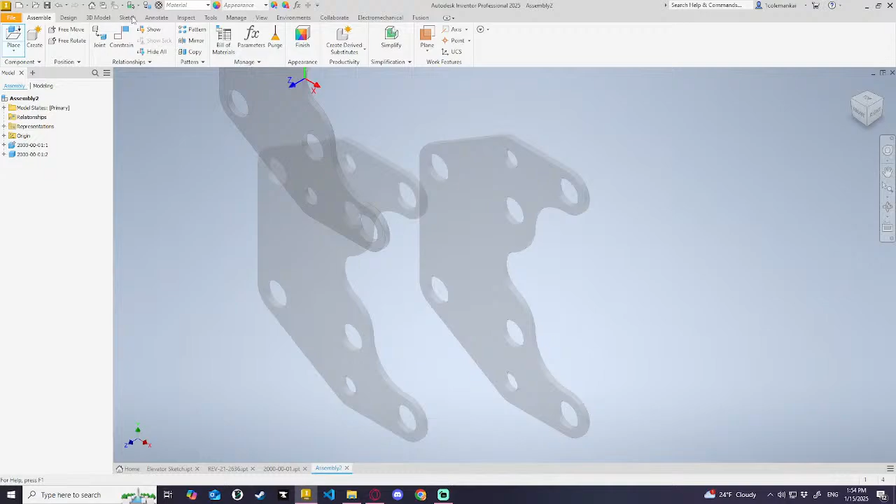This will definitely take multiple live streams, I'm realizing now. So I'm going to get all the bearings in. Oh, I need to add holes for the Krakens. Next to a sketch. I guess I'm projecting the whole thing. Just want that circle.

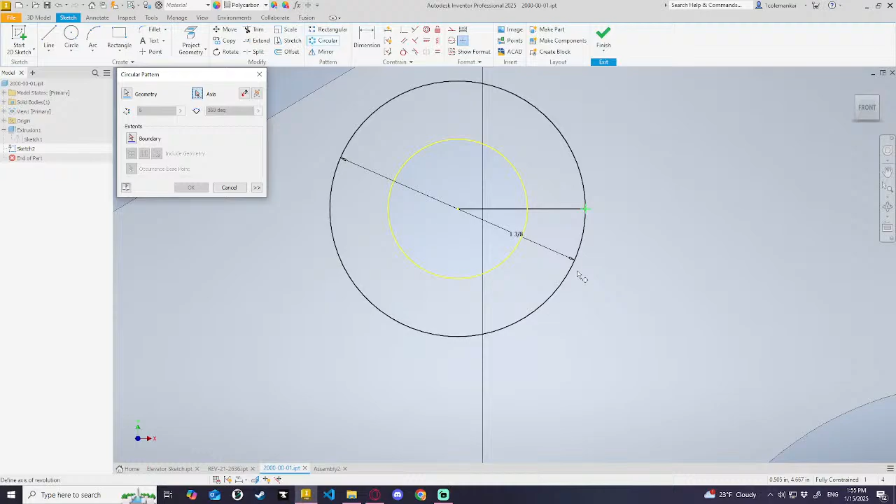And I want to... I'm going to project this, like this line. There. Like that. That should give me a good spacing.

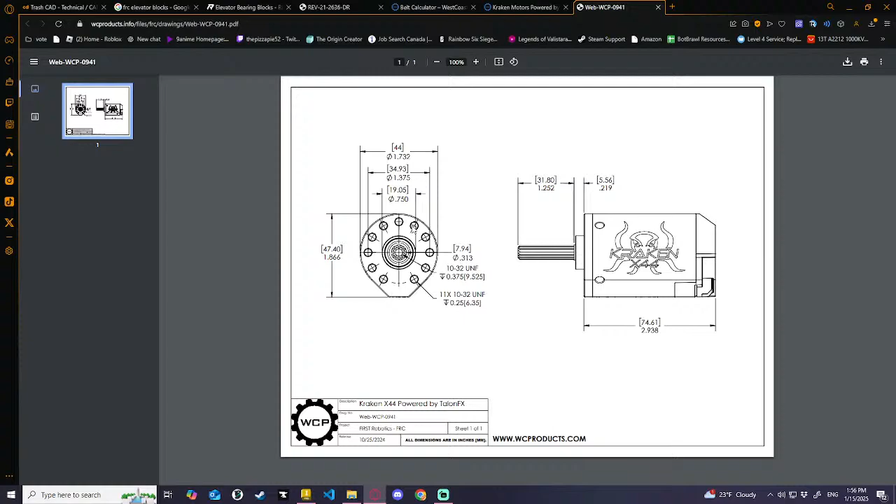These are... what size are these? 10-32. Yeah, 10-32, so clearance for number 10. I only need 6 holes. I'll probably only use 3 when I add hardware, if I do.

And I forgot to mirror that. I'll just... and I'll just include everything in that mirror, moving it below the end of part and everything. But I don't think I'll be mirroring too much else. I think it's just... there's going to be a lot of belt covers for this, which is fine. I mean, they're fun to make. And I might just leave the belts exposed for now and worry about that at the end, making it look pretty.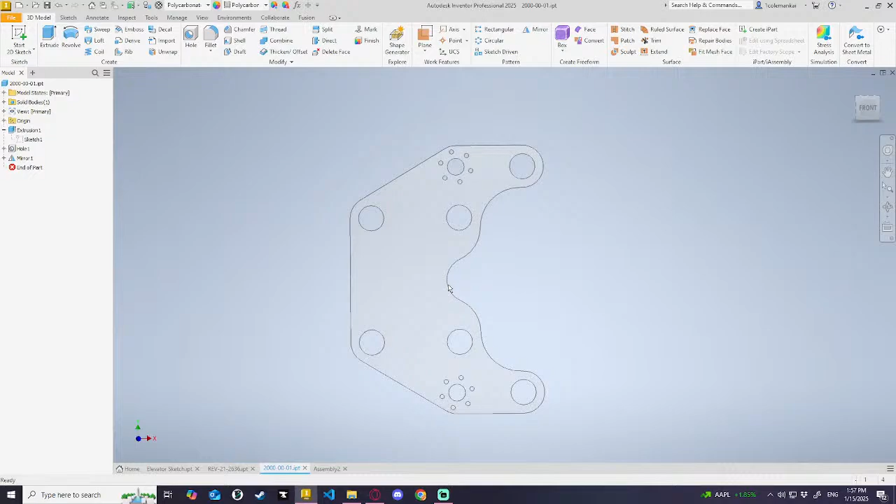Yeah. Okay. Krakens are ready to be mounted. I'll do Krakens first before bearings. Motors, that's 44.

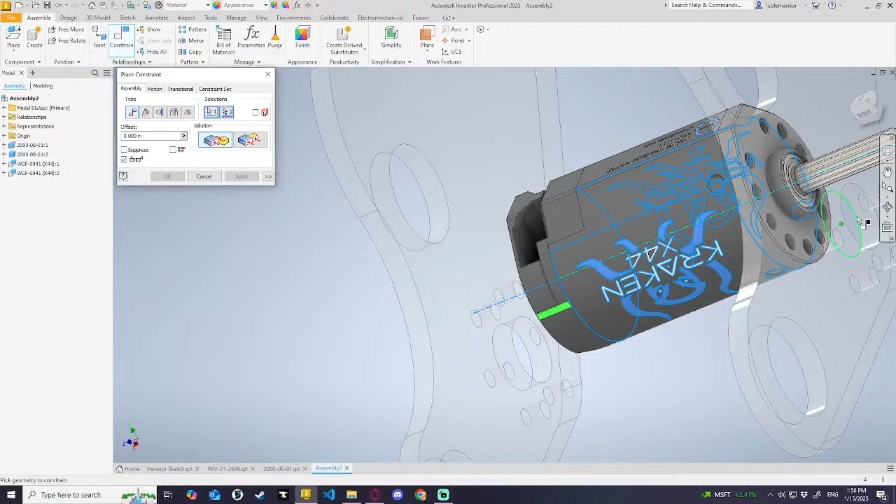Let's do it straight up that way. No, we'll move it 1 that way. Yeah. Nope, 1 over, this one. Now, there we go. Those are, are they facing the same way? No, they're not. They're going to pull off.

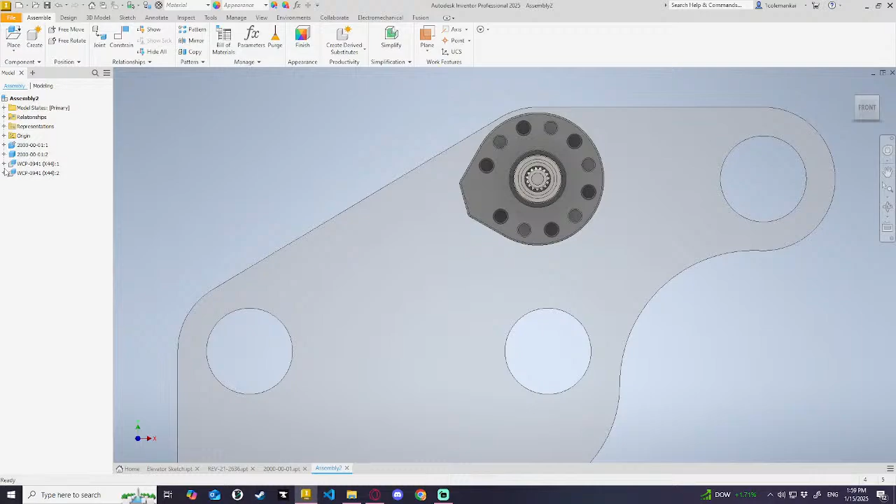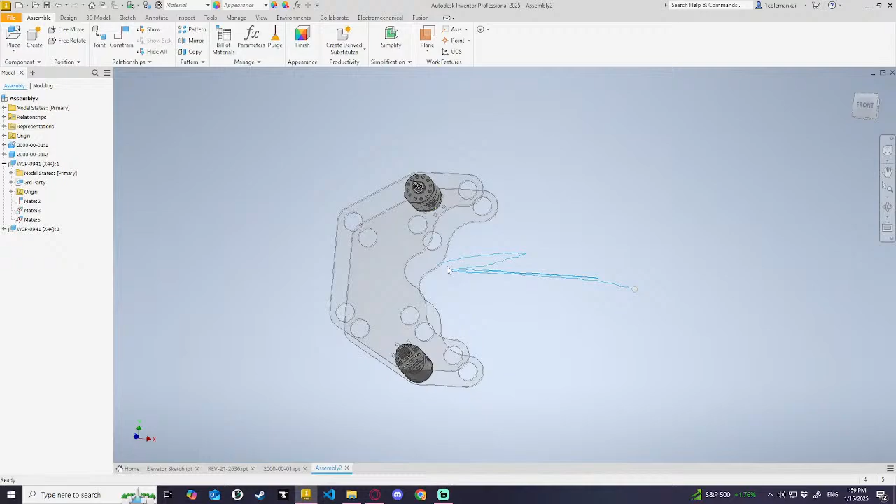Yep, that's right. I'm gonna make this 4 and let's say 3/4. 4 and 5/8. That'll work. The coral's gonna go in through there, or coral's gonna go in through this way. Ignore my terrible arrow. It's gonna go this way, and the algae is gonna come in this way. Yeah.

I like this. I'm gonna add bearings, then I'm gonna stop the stream for today. Maybe I'll stream more later, but it's been an hour and I need food.

Just bearings. I want hex bearings, flanged. This one. 1, 2, 3, 4. 1, 2, 3, 4, 6.

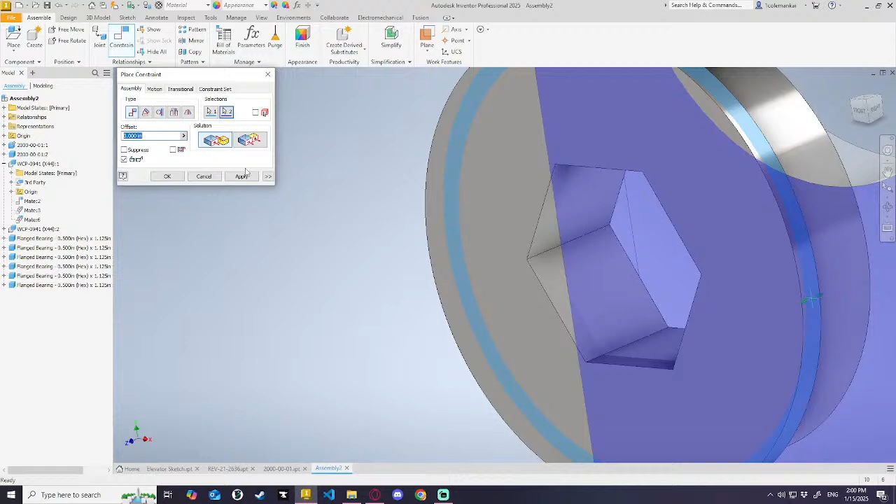Do face first. I need a new mouse. My scroll wheel is messed up somehow. Maybe I just need to clean it.

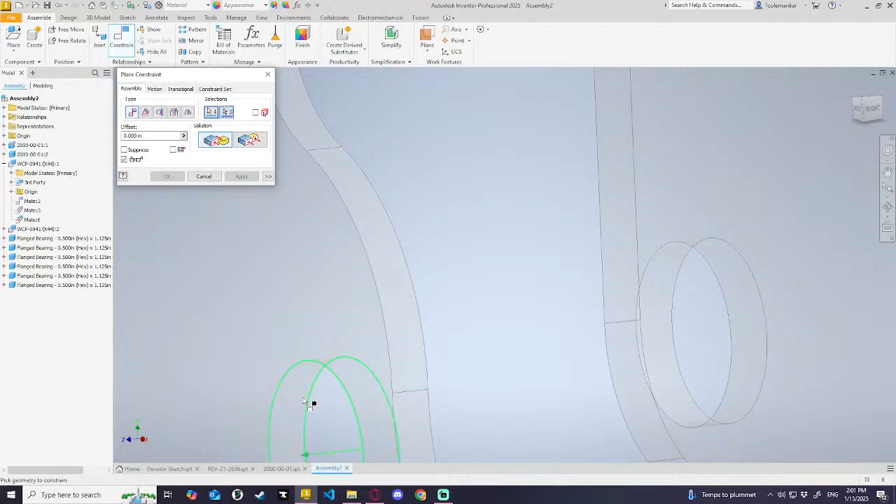It's that one. It's that one. Cancel.

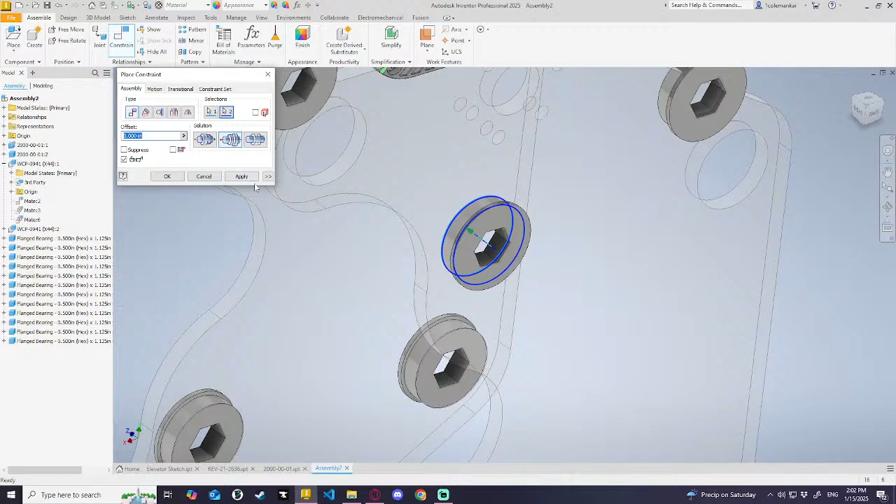Right, there we go. Now this assembly is in progress. Happy with how it's looking so far.

I'll do 0. What is 0, 0? Yeah, because there's not going to be really any sub-assemblies for the end effector.